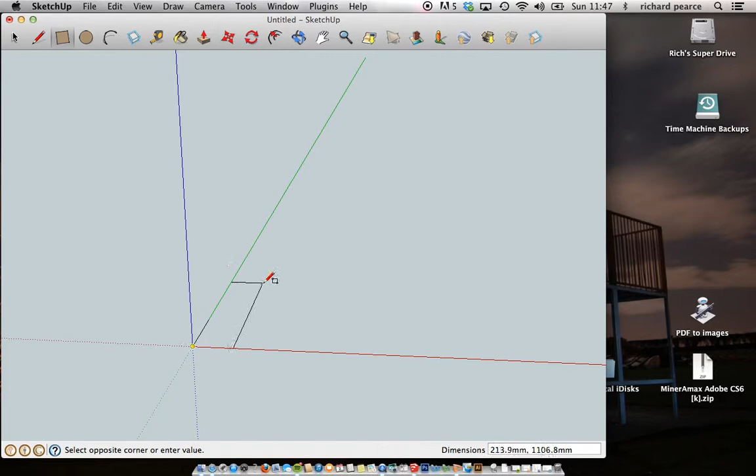Now I'm going to show you a couple of ways to do this. First, the quick and easy way: you will need to draw your base from the side. Using the rectangle tool, I'm going to draw a rectangle, make sure it's up in the air like that, and then put the measurements in. I think it's about 150 by 100, but you can measure yours to make sure.

Now what you will need is the large tool set, so we're going to go to View, Tool Palettes, Large Tool Set. Then we're going to use the pencil tool, and you're going to draw on roughly what your triangle base looks like from the side.

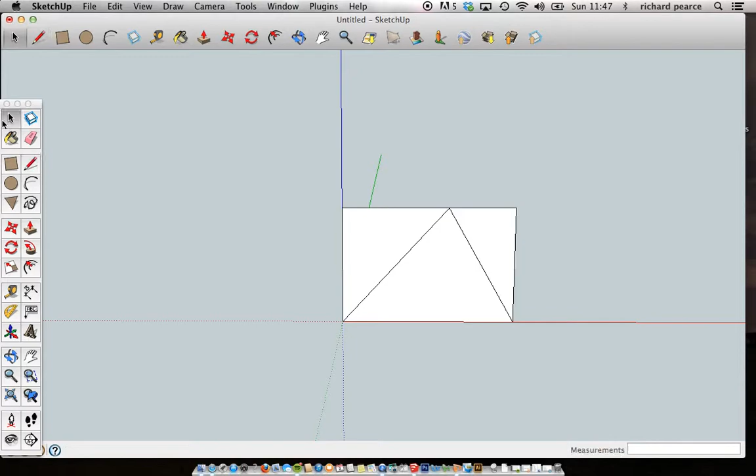Happy with that? Now this is very simple. Just delete the lines that you don't want, leaving you with the triangle, and then you're going to push it across, about 100, and there, that could be your triangle base made.

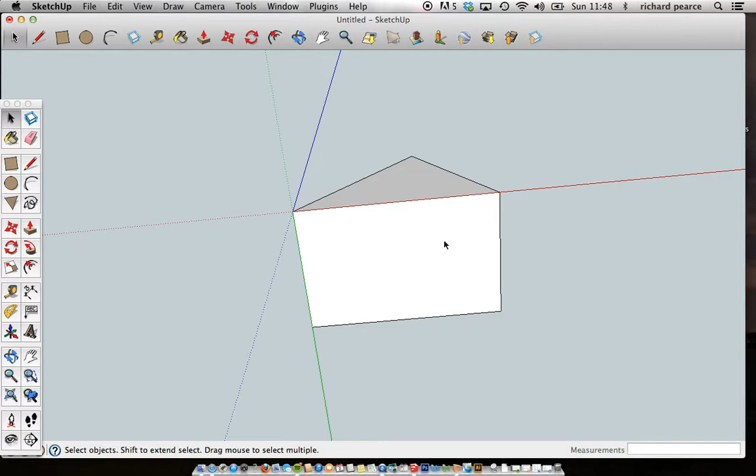So that is the really quick and easy way to do it, but that is not accurate, because it is not hollow. Here on your triangle this is all hollow because it was a box construction, whereas this is solid, and that is not going to work if you try and put a clock mechanism in it later.

So to do it more accurately, it's not massively dissimilar. You're going to draw it from the side to start with, 150 by 100. Once again, draw your triangle on, exactly the same as before, something like that, then delete the lines you don't want.

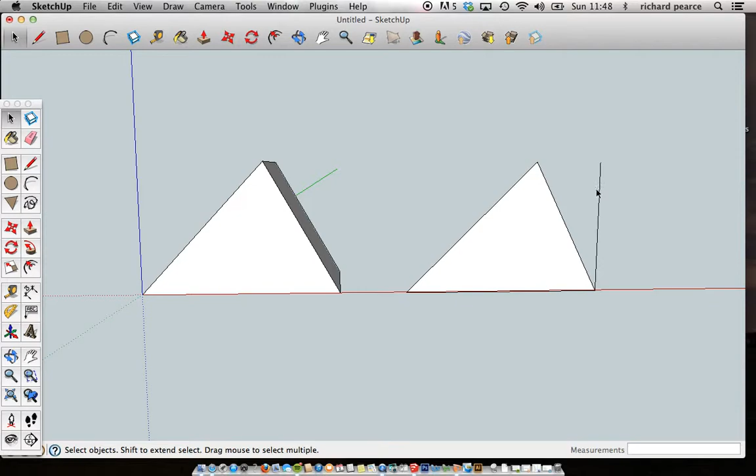But this is where it changes. We now need to make the sides of the box. So the way we're going to do this is we're going to copy this twice. To do that, I'm going to move it, but when I press move, on a PC I'd press the control button, on a Mac I'll press the alt button, and that will make a copy.

That is really cool. Now these are going to be the sides, so I'm going to push this to make a side thickness. We used about 9mm thick MDF, so I put in 9, and that is now the side, complete.

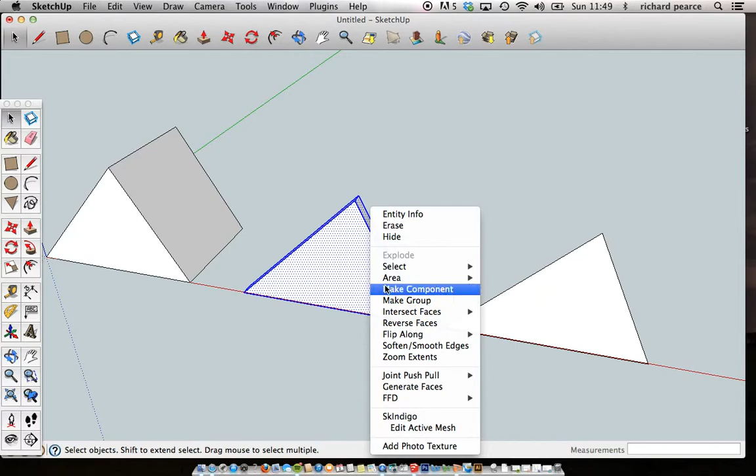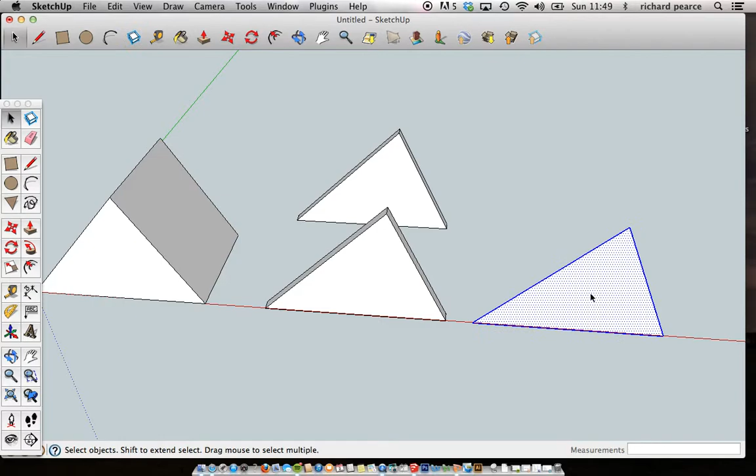So to do that, this is where it gets a little bit weird. I'm now going to use a new tool, which is the guide tool, which looks like a little measuring tape. This is one of my favourite things and it's very useful.

So along this edge, I'm going to pull out - can you see that little dotted line? That is a guide. Now that needs to be the thickness of the top and the back sides, which is 3mm. So I'm going to put a guide at 3mm from the edge, and 3mm from the edge here. Everyone happy with that?

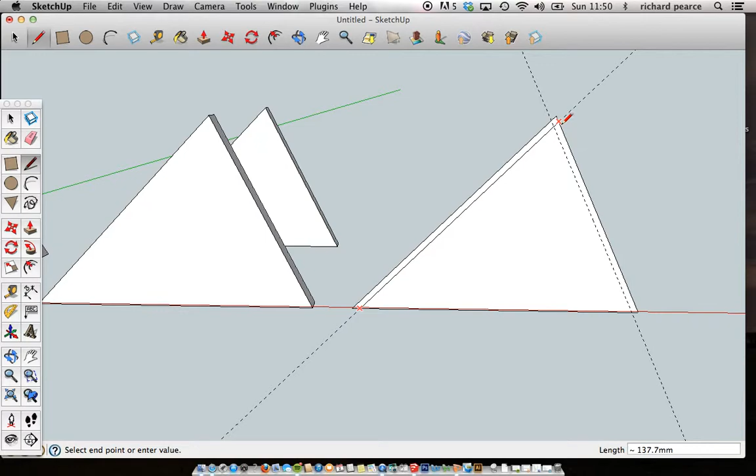Good. Now I'll grab the pencil tool again. Now I know the top overlaps the back, so I'm going to put a thing up there, and then draw a pencil line to there.

Right, got that so far, triple click to select it all, then I'm going to move it, and I'm going to make a copy because I need 2 of these.

Now it's a case of deleting the lines that I don't want. So I don't want this. I'm going to make the top panel first.

So you can now see, you can stretch that across, I think it's about 100, but you can get your own measurement. Oh, did that the wrong way - never mind, doesn't make any difference. And that is now the top panel. Then you can start building your box.

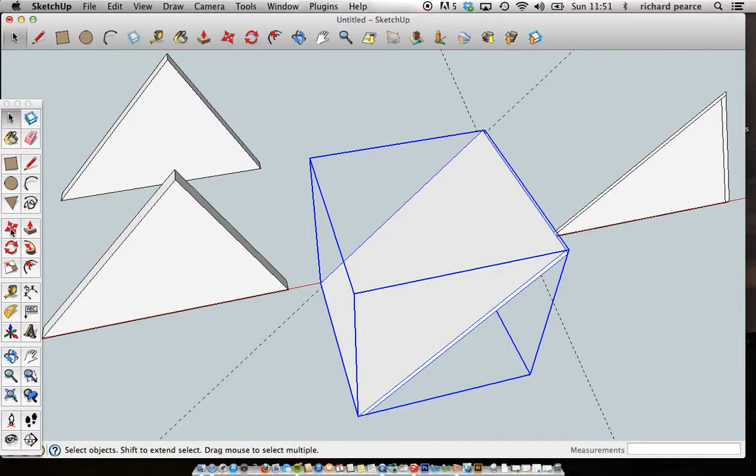Be a bit careful about where you move it. I always grab this little point here, and then I put that down there. Oh, that is looking nice. Grab the other panel, put it next to it. Sweet, oh, you can see this taking shape now.

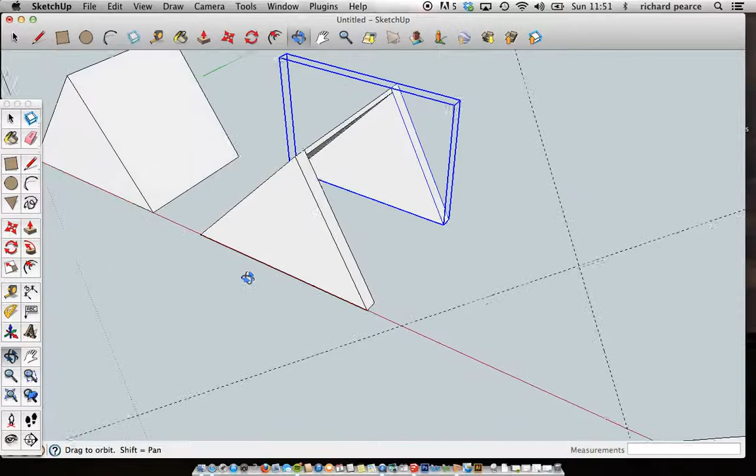That's beautiful. Right, now these guidelines can get in the way sometimes, so you can either select them and delete them, or you can go to Edit and Delete Guides, and that'll get rid of them.

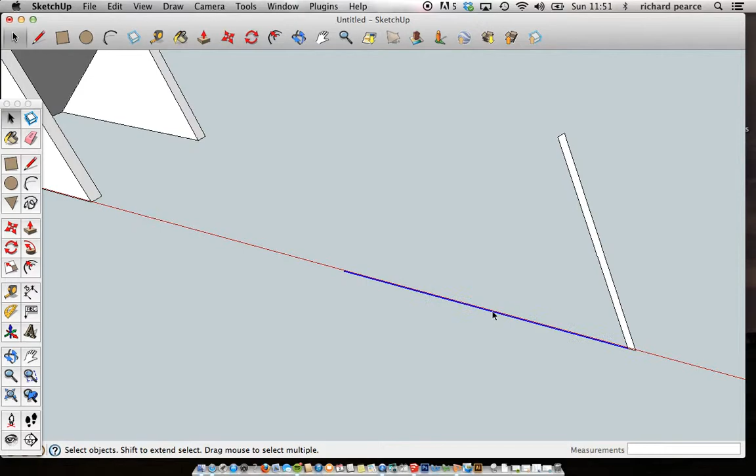Then on the other panel, I'm going to select the lines that I don't want, delete those, leaving me with just this back panel that I push across, 100. Oh, that didn't do that, let's try that again. Yep, there we go. Finally, make that a component, 'back'.

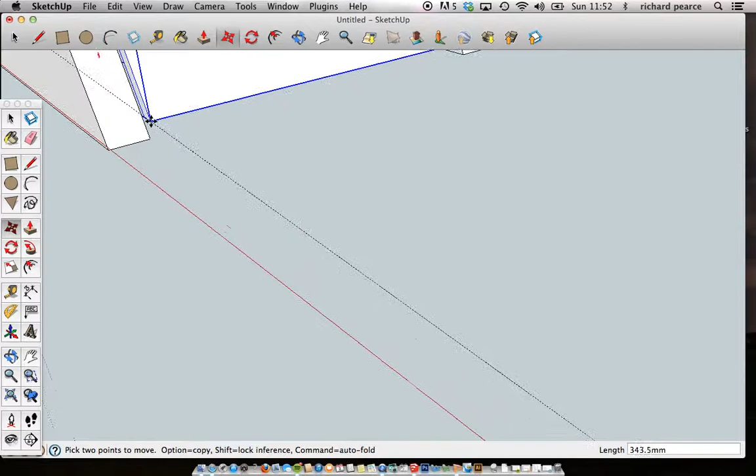And then I'm going to move that into my model, and there you have the triangular base, but this time it's made properly and it is a box. Okay, good job, thanks very much.